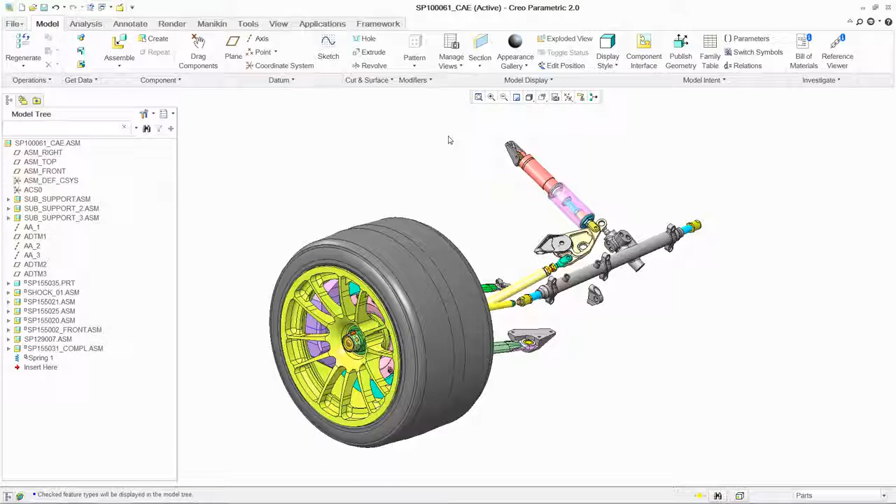PTC CREO has extensive simulation capabilities, enabling designers to easily analyze both parts and assemblies. You can investigate the structural, thermal, and motion behavior of your designs under real-life conditions. To begin your analysis, PTC CREO provides an easy-to-follow process with an intuitive user interface.

In this case, loads are quickly applied to a steering assembly, reflecting a range of motion the wheel would experience after hitting an obstacle on the road. Executing the analysis is simple, and while the simulation runs, visual feedback is provided, allowing you to confirm that the loads have been properly applied.

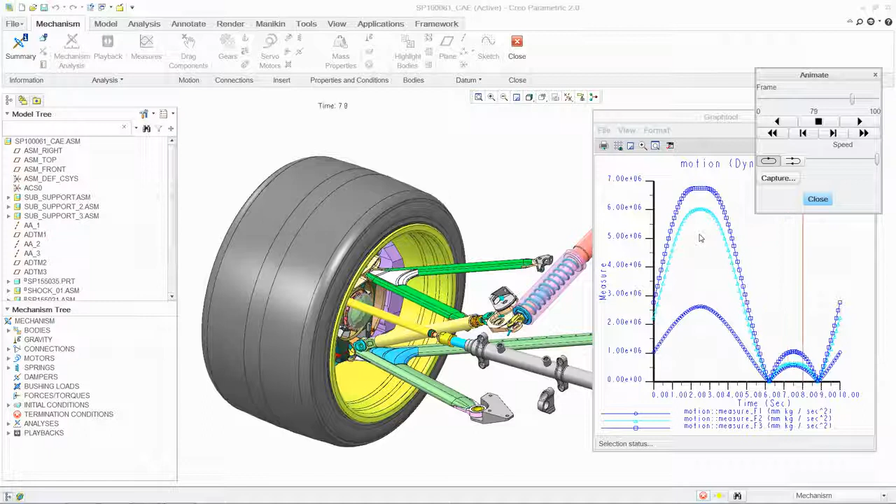Once your simulation is complete, the results are provided through clear, informative graphs and dynamic visuals. This dual feedback provides designers with an immediate understanding of how a mechanism is functioning, including the dynamic loads generated in the assembly. In turn, these loads can now easily be used to perform further analysis on individual components.

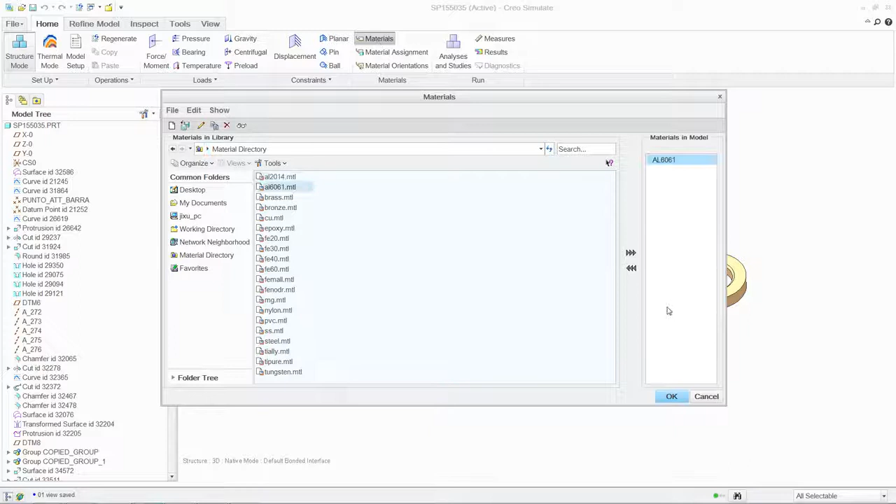For example, structural analysis can be used to evaluate the performance of a component against specifications. In this case, using the dynamic loads to analyze the stresses generated in this connecting bracket. Once again, setting up the analysis is intuitive. Simply follow the steps to select material properties from an extensive library, apply the loads to the relevant areas, and finally, apply the boundary conditions.

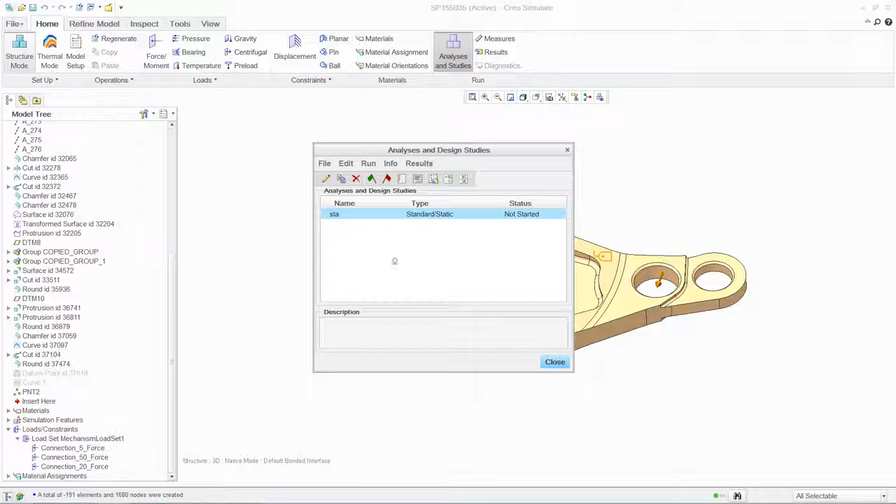One major advantage of PTC CREO is automatic mesh generation. It requires no interaction from the user to create a high-quality mesh for analysis, saving significant time. Once again, executing the analysis is simple and fast with PTC CREO's powerful embedded solver. In addition to this linear static analysis, you can also conduct nonlinear, buckling, and dynamic simulations.

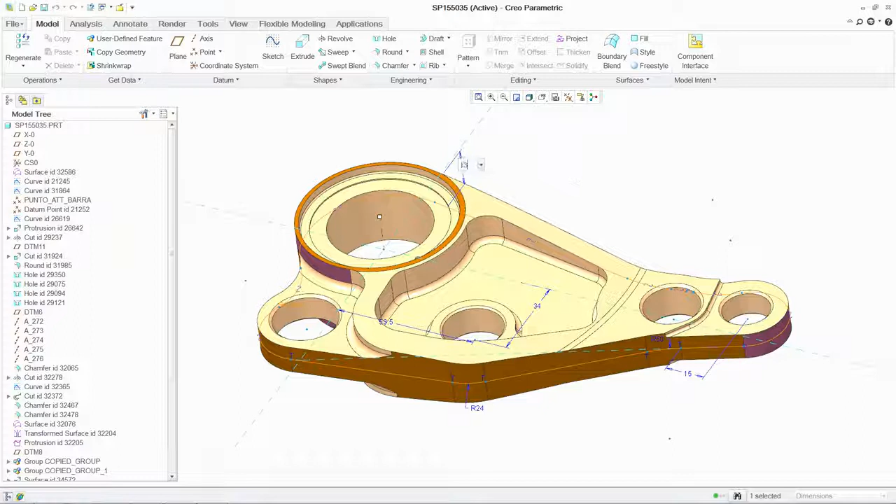And interrogating your results is easy using contour plots, animations, and graphs. You can also automate the creation of reports for sharing this information. The next step is to act on these results, and optimizing parts is simple with PTC CREO's seamless integration of analysis and modeling. This ability to quickly optimize parts can generate significant value for companies in the product development process, in this case to reduce the weight of the part while staying within specifications.

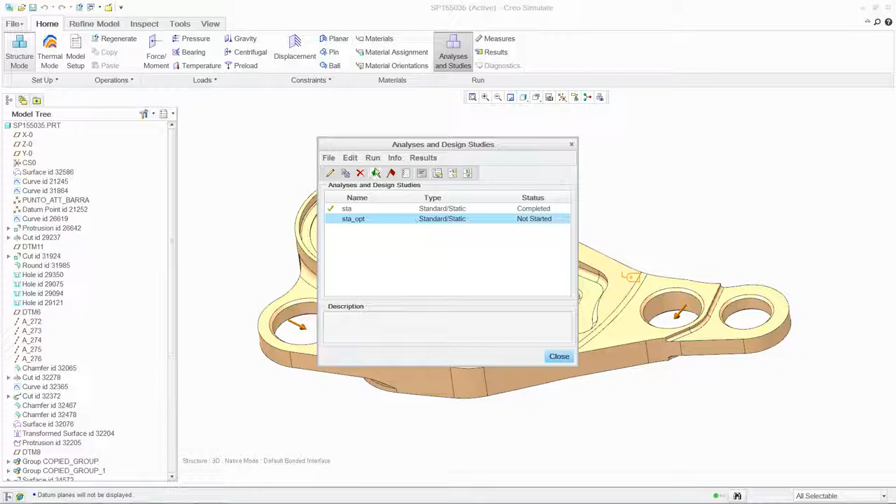And this process can even be automated to quickly iterate design variants, eliminating what is typically a manual effort. We can then reuse the previous analysis setup to quickly obtain and visualize results. With PTC CREO, you can also conduct thermal simulations. Similar to mechanisms and structural analysis, setup uses the same easy-to-follow process with an intuitive user interface, thus reducing product adoption time and permitting designers to be productive faster.

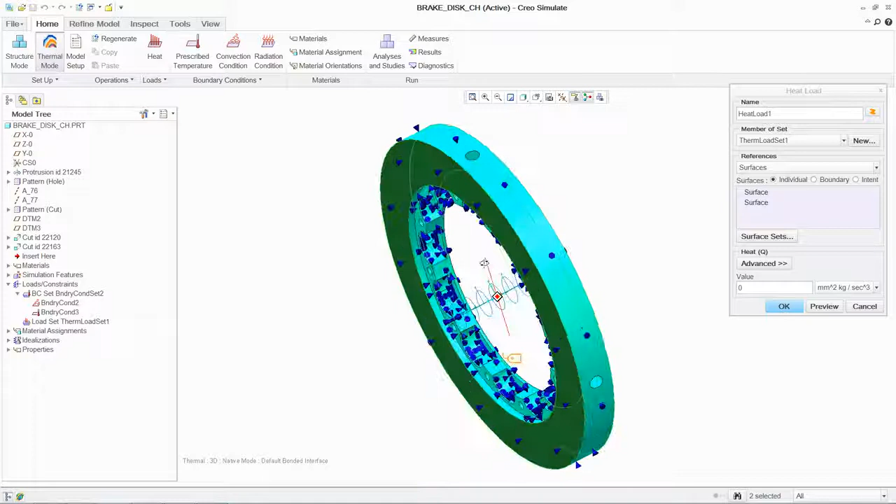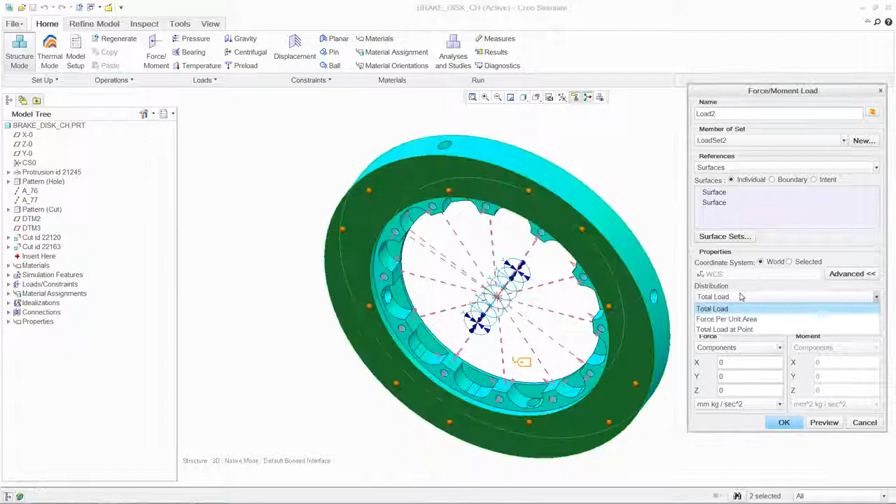Once again, the analysis is simple and fast, making results quickly available for review. These results, in addition to the mechanical loads, can then easily be applied to the brake disc. This enables you to better understand how thermal expansion will impact the structural integrity of the part. Furthermore, multiple load cases can be analyzed simultaneously, enabling designers to understand the individual or cumulative effect that different boundary conditions will have on a part or assembly.

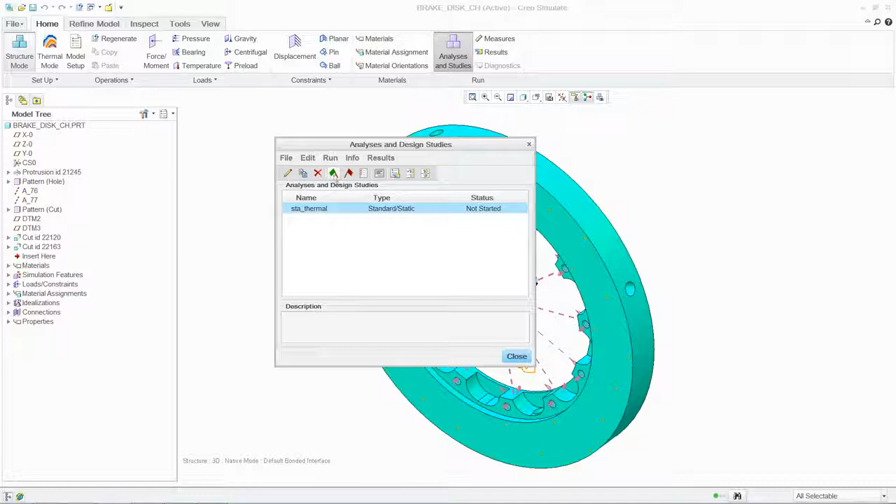In this case, investigating the level of stress and deflection in the brake disc as a combined effect of mechanical and thermal loads. With PTC CREO's comprehensive simulation capabilities, designers are empowered to easily analyze parts and assemblies. And with seamless integration between analysis and modeling, designs can be quickly optimized to drive immediate value into your product development process.